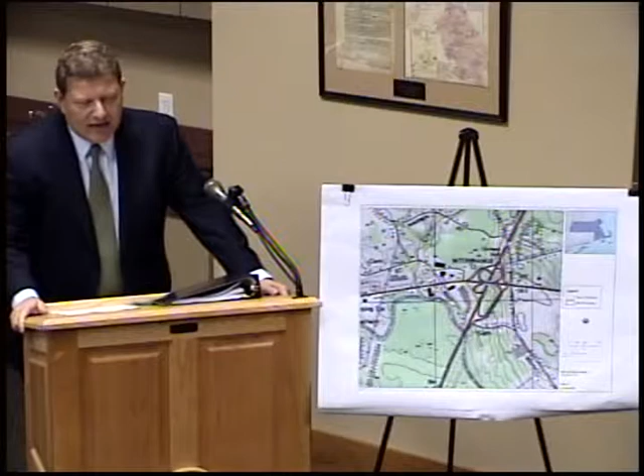So I guess I will say what I think we believe is going on up there, and I think that the position that we've put out in the RDA and the recommendations that you've gotten from Ms. Nover really indicate that there's probably some additional facts that need to be gathered to conclusively determine whether or not there's a hydraulic connection between the wetland that's north of the hotel and the channel that goes by the RK site. So this is what you're looking at here.

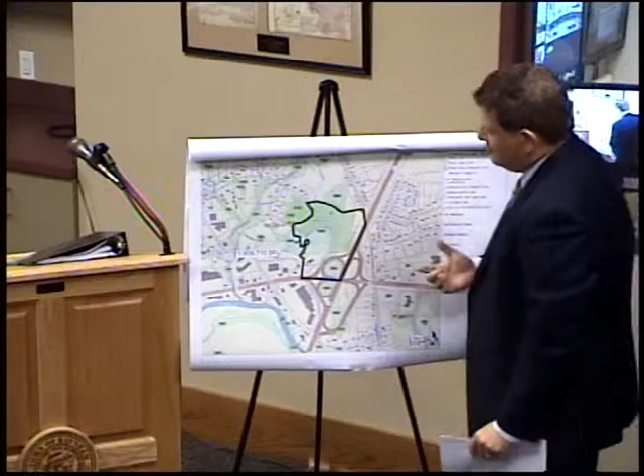Based on the field work and investigations that EEA has done for us in this area, our view is that this channel conveys stormwater from the southwest quadrant and the northwest quadrant of this interchange. The connection is shown here on the plan between the northwest quadrant and this channel, this intermittent stream.

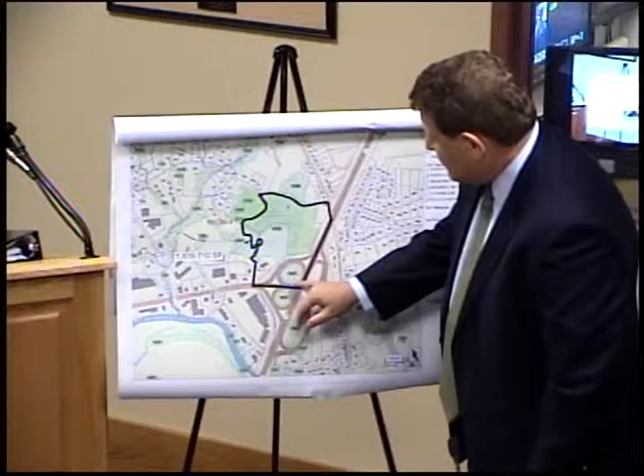It runs down to the east of the hotel. There's really no connection shown on the plan between this wetland in the southwest quadrant and the wet area in the northwest quadrant. But based on what I have heard and read and seen in other plans, there is apparently some connection, and the water goes to the north and then to the west, then into this intermittent stream.

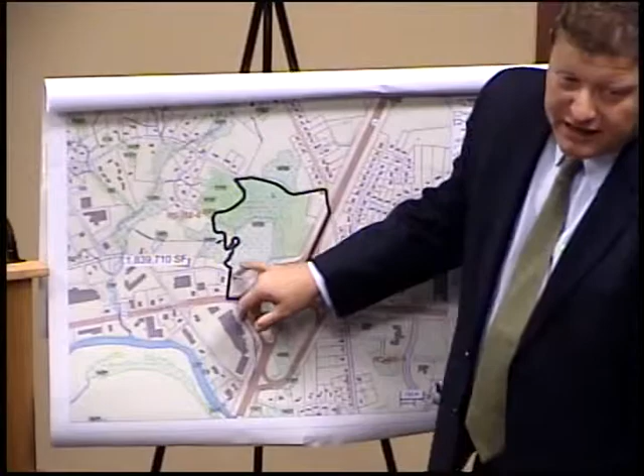So there are a couple of things we believe are not happening here. One is the hydraulic gradient between this intermittent stream and the channel that's in back of the RK property. We don't think that's been established conclusively. The plans we've seen from the NOI filed by the hotel property show this as a 25-foot elevation.

We know there's a pipe that goes under the road. Plans from MassDOT, some historical plans, show it in a couple of different locations. There's one plan that shows it on this alignment, and other plans that show it more on this alignment where you see this blue line.

So we're not at all convinced, not at all certain, based on reading Ms. Nover's report, that there is a hydraulic gradient here. There's clearly water behind RK, but that water is coming from the reinforced concrete pipe that leads to the catch basin, and it's coming from, I believe, a couple of other connections that come off the MassDOT property. So the hydraulic gradient, I think, is still in question.

We don't think it's been established. We believe it's not there based on our field work and field observations. The second point that I think is not at all clear is whether or not this intermittent stream actually connects to the wetland. If it only connects to the wet area inside the interchange, then it's not a jurisdictional area, it's not a resource area, and the water coming through there is coming through because it's an artificial stormwater BMP.

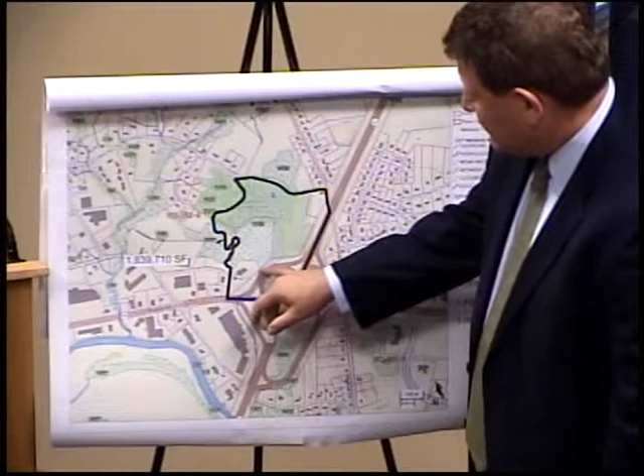It's in this general vicinity, but I'm not sure that it comes this close to the southbound off-ramp. So our position remains that it's not a jurisdictional stream, it's not subject to the act, it's not subject to the bylaw. And the work that we did out there was further maintenance of the channel, intended to discourage mosquitoes.

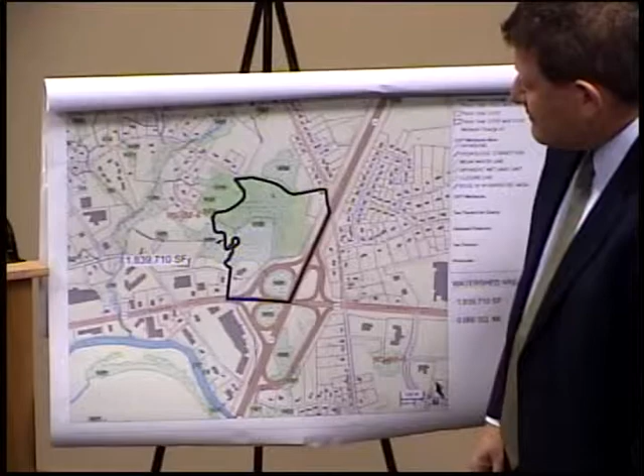Certainly, I think the cutting down of the trees went further than we had intended, and we're willing to restore those trees, but it remains our position that it's not a jurisdictional area.

Yeah, I would try to speak to that, actually. I think that where they're going with this, I'm Nova Armstrong. I need you to get near a microphone so you don't get... I'm Nova Armstrong.

I think where they're going with this is the definition of a stream and hydraulic flow due to hydraulic gradient. I was out there, and I provided in my report a picture of this stream flowing up gradient of the subject site, adjacent to the Hampton Inn property on MassDOT land, that clearly was flowing into the 24-inch RCP that I provided a picture of.

I think that the topography provided by the Hampton Inn application wasn't detailed, and the channel is very channelized and deep in places, and they didn't get elevations along the channel from what I can see. I have a copy of that Hampton Inn plan that I actually got from the Conservation Commission office, if I could step up.

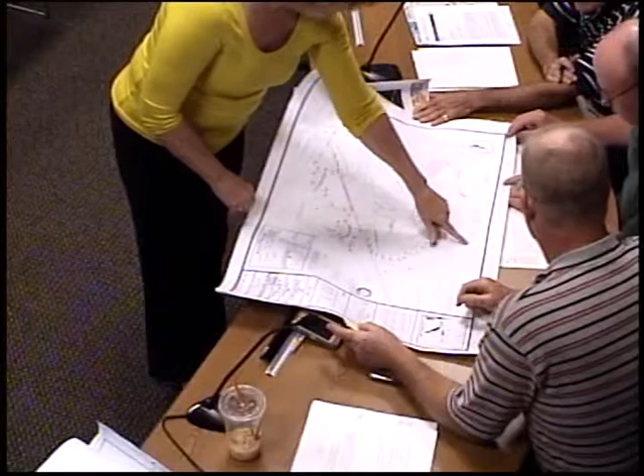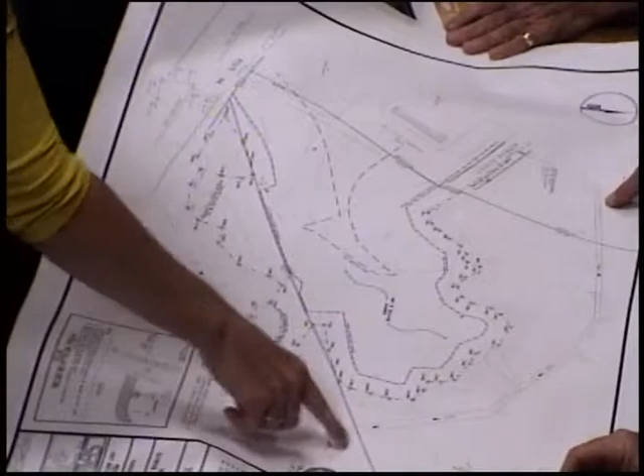So this is the plan that I obtained from the Conservation Commission office, and it shows it as a swale, and this swale enters another channel that comes in this direction. This is the actual intermittent stream, as well as this intermittent stream. There's no real topographic detail along the stream, and it's very deep in areas, like I said.

It's channelized, and it's constantly cutting, so it's becoming deeper and deeper, and it was flowing into the RCP yesterday when I observed it. As well as on the other side, on the subject site, it's entering Mass highways, Commonwealth of Mass land, and it's actually flowing by hydraulic gradient from the outlet to the site.

I took pictures of that. Unfortunately, I didn't print those out, but I do have a picture of it. Do you have a plan that shows that connection? I do.

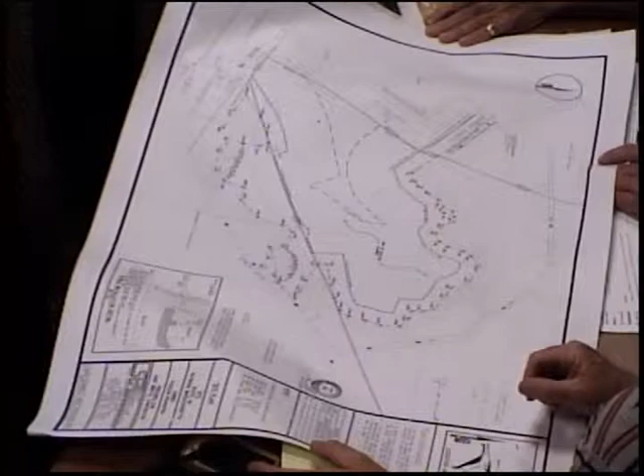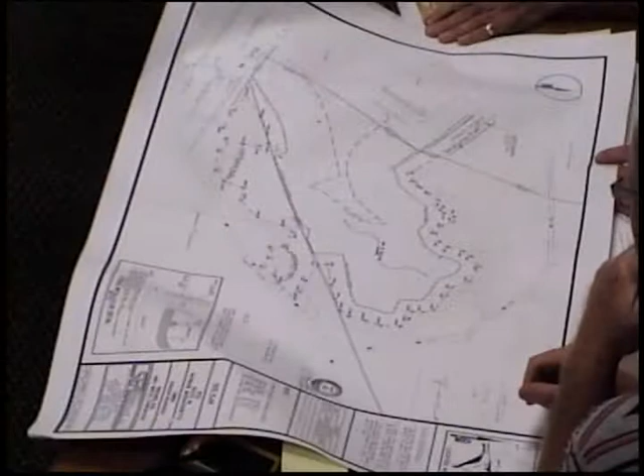But before I show you that, another point they were making was that the stream, this culverted wooded swamp, flows across under what I think is the southbound ramp, and enters this channel and flows onto the property. Actually, there are two other intermittent streams that flow into that stream as well, through this wooded swamp. There's a flea market back here.

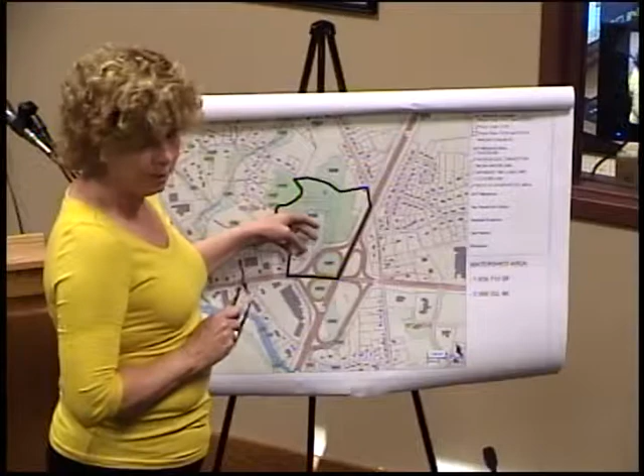If you look at Google Earth, you can actually see the channels there. So there are two other intermittent streams, I believe, that come through this wooded swamp and flow into that stream, which is the historic Pale Brook, according to Mass Highway historic plans. Sorry, can you hang on one second?

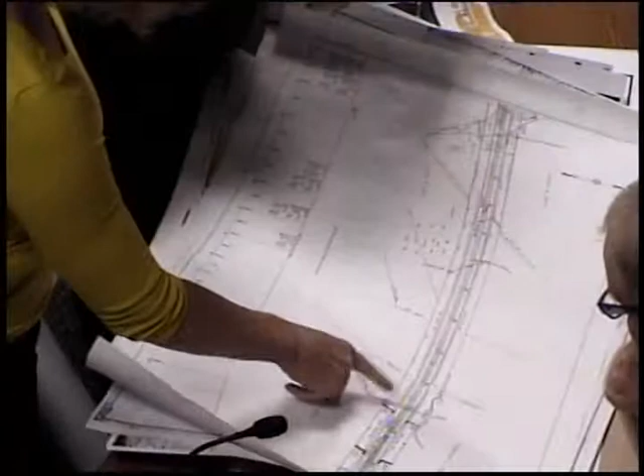There's a couple of plans. I think the important thing to note is the location, at Station 56, with the 24-inch RCP. This plan was actually provided by Mass Highway tonight to show the commission.

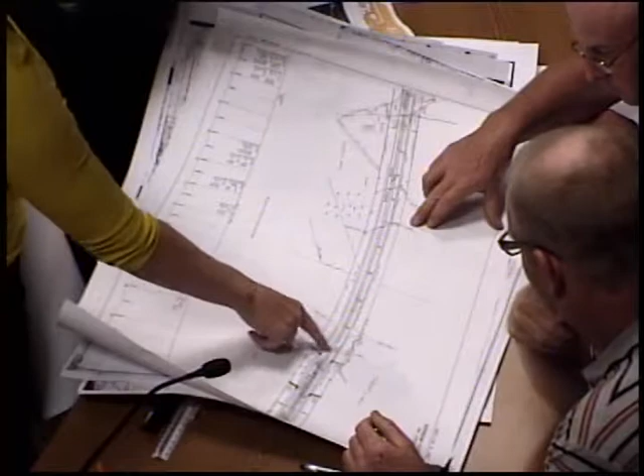I do have other plans. This one is titled Raynham Cutoff, 1932 construction. Here's Pale Brook at Station 56. This doesn't actually exist anymore because the alignment has shifted more this way.

Just a point of information, Attorney Darrow—if you would let her finish. Okay, so that's that plan.

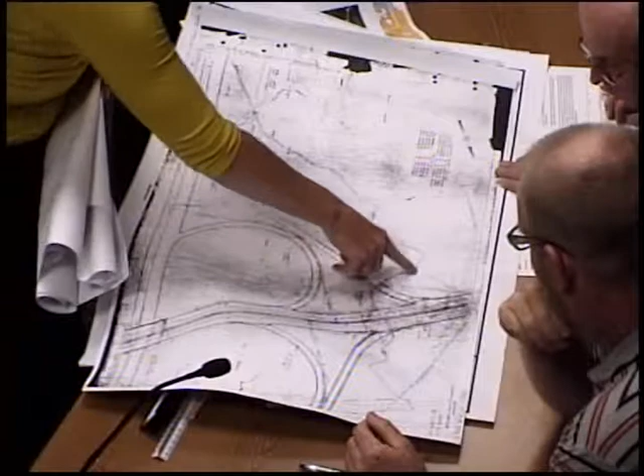Here's sheet 19 of 36, the Raynham Boston Fall River Expressway drainage detail. Here's Station 56 again, and here's the brook coming in under the highway through a 24-inch RCP. Here's the cloverleaf shown. So it comes in and flows off to the Taunton River, located south of here.

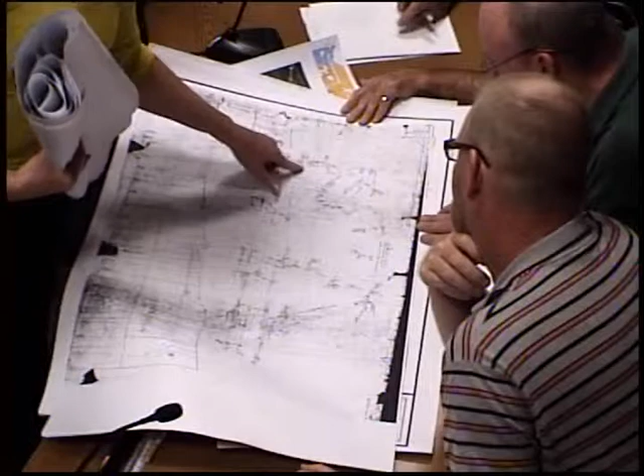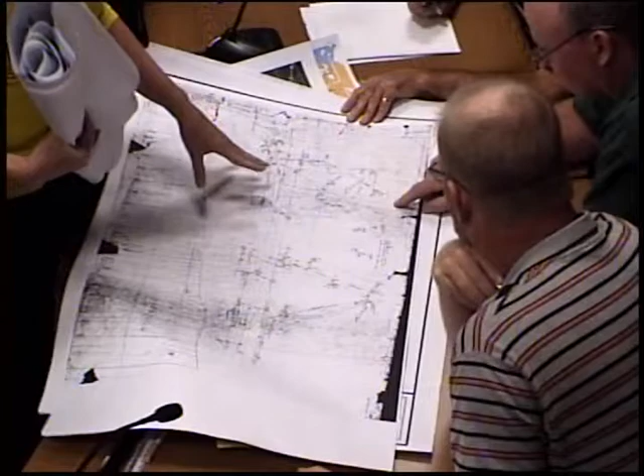Here's another plan—these are old, a December 1949 plan. It shows the 24-inch RCP that was extended in '49, and it looks like a headwall was constructed. It shows old Judson Street here, and a series of ditches and streams flowing through that were most likely channelized over the years and not in their original location. Again, Station 56.

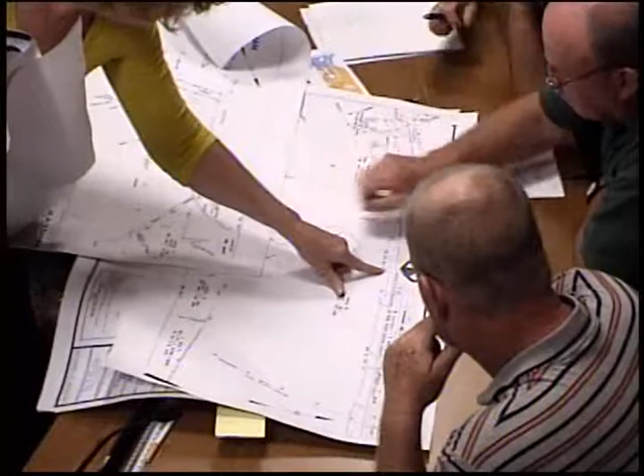This is a picture of the same brook, from a 1950 plan. It shows the 24-foot easement here, which connects down to here, and goes like that. Here's Station 56 again, showing the 24-inch RCP. So many historic plans show that 24-inch culvert under Route 44 carrying an original stream, Pale Brook.

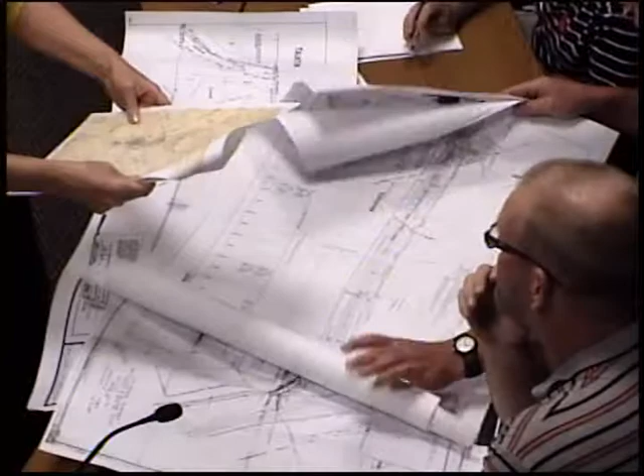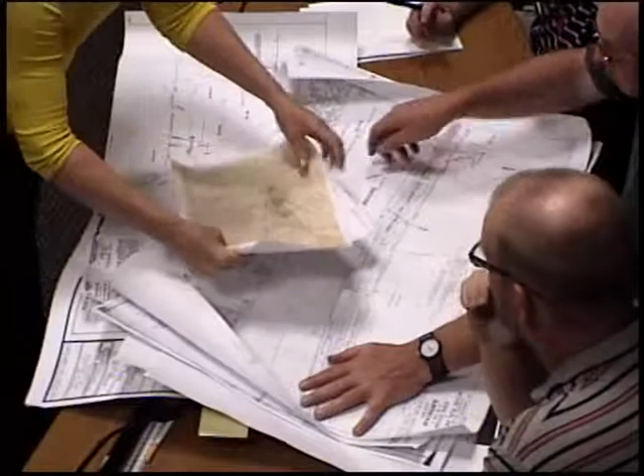Additionally, these are all plans for your file—copies for the commission. There's also a historic USGS sheet, I believe from 1893, that shows this stream right here.

This is Dam Lot Brook flowing here, and this is the stream. It's actually flowing under South Street right here.

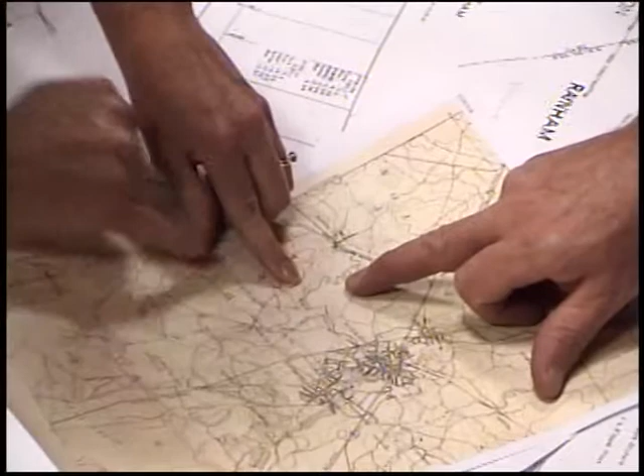I think the question they're raising is about the hydraulic gradient. To me, there's a clear hydraulic gradient from the north side of Route 44 to the south side, based on my observations of water flowing into the 24-inch culvert and out the other side, then through the Commonwealth Mass land east of the property boundary, on the east side of the chain link fence.

So the whole—yeah, these are part of your file. That's right.

The point of my goal was to determine whether there was an area subject to protection on the site, and from there, first determine that there is an area subject to protection—meaning the stream, its banks, and land under it—and then an area subject to jurisdiction, extending 100 feet from the bank and land under. Then also, there's still the question of whether that stream is a river, and we didn't have time to fully evaluate that.

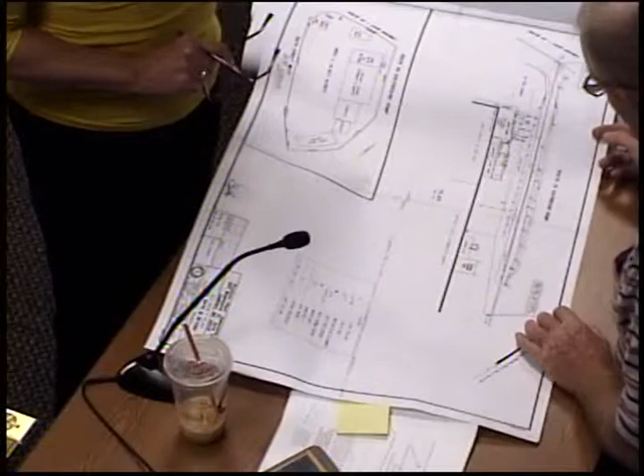This plan here went with the certificate of compliance request that I obtained from the Conservation Commission files. What this shows is, I believe it was Walter Hewitson that flagged this, because he marks his flags with WH, and the channel is here. He actually hung flags west of the channel, which indicates there's some fringing BVW along that channel.

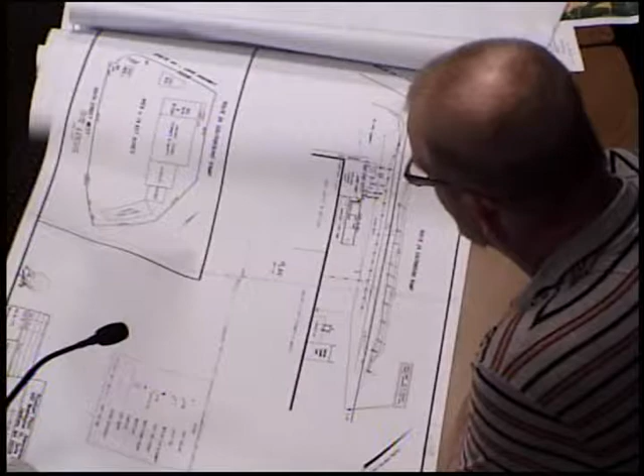This is just another supporting document showing it was the opinion of other professionals. Walter Hewitson has a PhD, and this was an area subject to protection, therefore warranting flagging of the bank and vegetated wetlands. And this was done for your property?

We didn't own it at the time, so we don't know what purpose it was done for. It was the change from Kmart to Bed Bath Beyond, that remodeling, and that's what it was done for.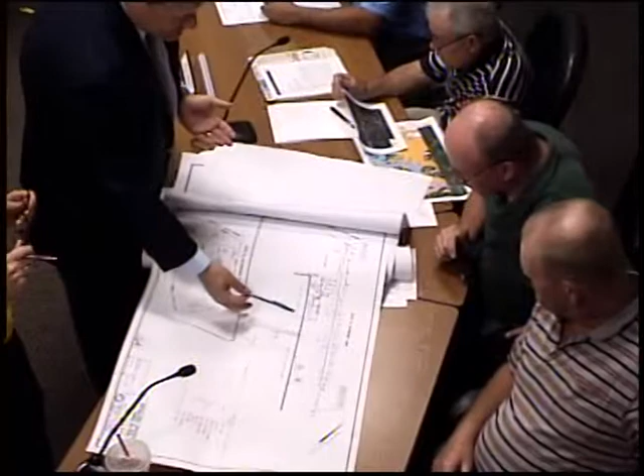Could I raise a question about this plan? Is there a wetlands delineation report that went along with it? Because this doesn't indicate to me that a wetland has been flagged. In your report, you said this plan showed a stream here, called out as a ditch. This is clearly a stormwater conveyance, and the fact he chose to label it as such - we've got a ramp right on this side of the ditch. I don't know what he would have been flagging there.

Well, this is just an as-built of whoever did the original flagged plan. This area doesn't actually see the finished plan in most cases. Hayward, Boynton, and Williams, who drew up the plan, labeled this the southbound ramp, but it's really the easement and land associated with Route 24 and all the ramps. As for the labeling of the ditch, I've seen that - I've worked in this business for 30 years - engineers and surveyors call it a ditch all the time, whether it's a stream or not.

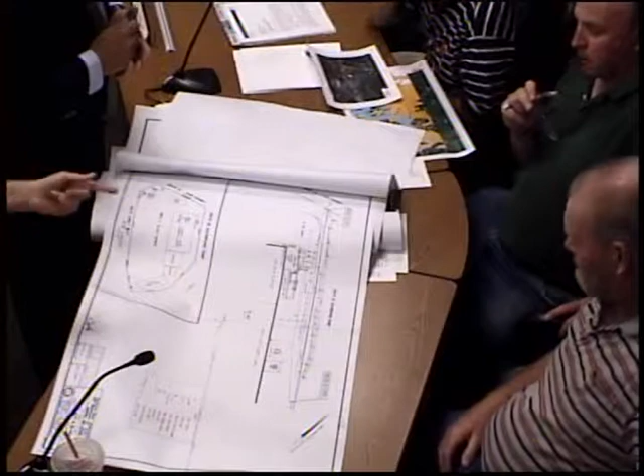So was there an NOI filed in connection with this? Yes, actually there are two applications on this property in question, which I found rather interesting that VHB and EA, in doing their research, either wittingly or unwittingly, left out, because they did have an opportunity to look at the files on record. It shows a notice of intent filed on that property under wetlands file number SE 269-601 and SE 269-676. So there are two applications.

Now, back when they filed those notices of intent, there was no Rivers Protection Act, but there was clearly a stream definition with banks, and they flagged both applications. They delineated those resources as banks and BVW with the notice of intent.

My question is about this 2004 work - this is a 2004 plan. Was there a 2004 NOI? Absolutely, there was an NOI filed for that, and an actual certificate of compliance was issued. Historically, from geological maps and street maps dating back to 1855, that is actually a named stream. So whether they call it a ditch, the fact is it's still a stream, intermittent - that's why they flagged it, and there's a bank resource associated with it.

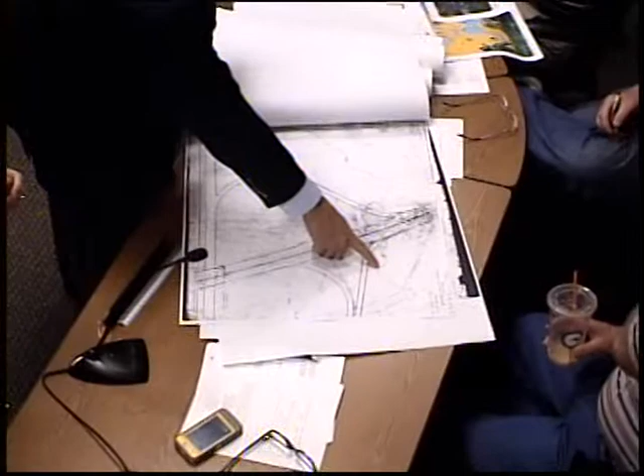But if I could just turn back to this plan - if this is the location of the reinforced concrete pipe, that's fine. But I've got to say, you've got a hotel in the middle of this brook, because when Hampton Inn came in and built their facility here, their plans showed the intermittent stream along this alignment, and they built their hotel and parking lot right in the middle of this brook. We've gone in, we've done a little bit of clearing, and I think we're being targeted here. There's a building in the middle of the brook - I don't know how that happens.

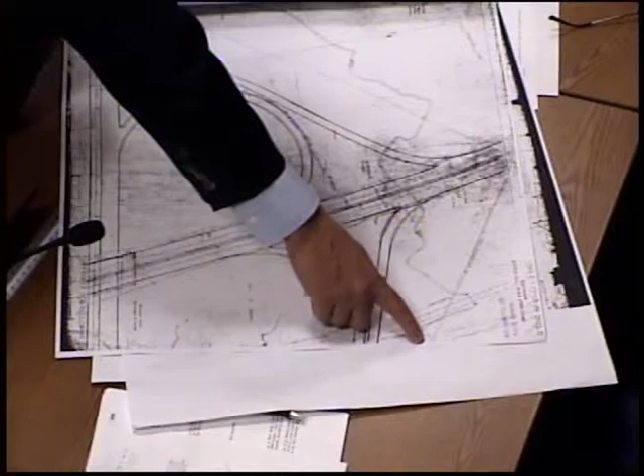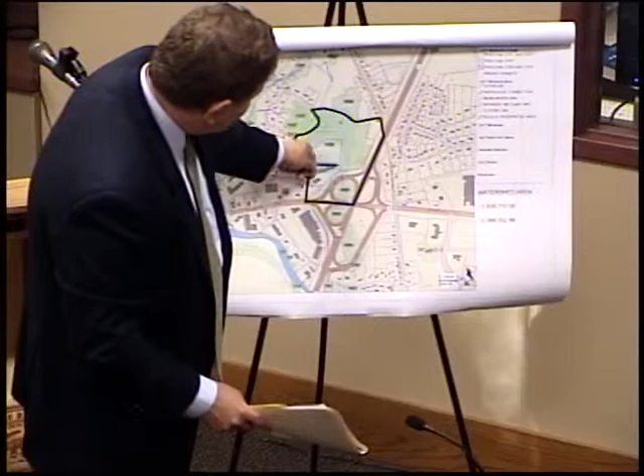Because every plan that I've seen that's current shows an intermittent stream along the southbound exit ramp that vaguely may connect to some kind of swale that comes from the west here. Okay, and this black line, all right, there's this part of the wetland. This is in question right here, whether there is actually a connection between this intermittent stream, which is in the same location that's shown in the Hampton Inn files, and this resource area. We think that's still fairly vague. Okay, but as I said, if you look at Google Earth, there's a clear connection that you can see, actually, from the area behind the flea market to the stream that flows

under 24. Hold on a second. Do you have the actual drawings for the hotel? I don't. No, I don't.

Mr. McCray, the point of the matter here is whether you find that the information supports that it's a perennial stream or not, you still have an inland bank resource. And that inland bank resource does not have to be associated with the perennial stream. It can be associated with an intermittent stream. And the hotel might provide information relevant to this application, but that is not the subject of your enforcement order, nor the subject of this request for determination.

No, I mean, right now we're arguing about somebody else's property, which we're not doing, but I'm just curious for something. I'm sorry, were you finished? Yeah, go ahead. Does that historical plan have elevations?

One other point: the definition of a stream flows out of or within an actual area subject to protection. Now, on the other side of the north side of 44, adjacent to the Hampton Inn, is a fairly large wooded swamp, which that stream, this stream, here, is flowing through. So regardless of what's going on up here, it's flowing through a wooded swamp in this location and under 44. So by definition, even at that point, it would be a stream.

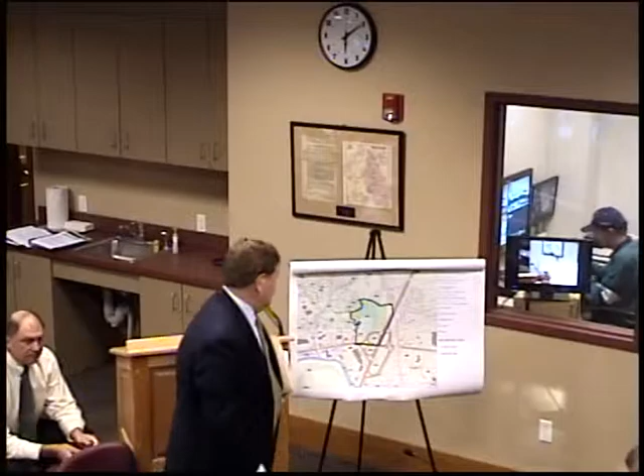I mean, it was clearly a wooded swamp, red maple, skunk cabbage below. There's evidence of saturation and flooding.

And how do you distinguish that from land that's subject to flooding? Land that's subject to flooding has a completely different definition in the wetland regulations, and it's associated with flooding and not vegetation in the wetland hydrology. Completely different performance standards, doesn't have a buffer zone.

Right, I mean, we're not arguing that there's water here, but we're arguing that it's a stormwater conveyance that serves this quadrant and this quadrant of the interchange. It's clearly wet, and it clearly has some wetland properties, but is it a jurisdictional wetland? Our expert says it's not.

Does anyone else have anything to say? Anyone in the public have anything to say?

I would just add, Mr. Chairman, that our desired outcome from day one has been to go in and restore the area. We'd like to do it under a negative determination with conditions. We think that meets everyone's purposes. We appreciate that the independent outside review recommended an affirmative determination, but we would be out there in a few days restoring the area, or at least talking to you about an acceptable restoration plan, if we have a negative determination here with conditions. So that's where we'd like to get to. Our position hasn't changed. I think that's it.

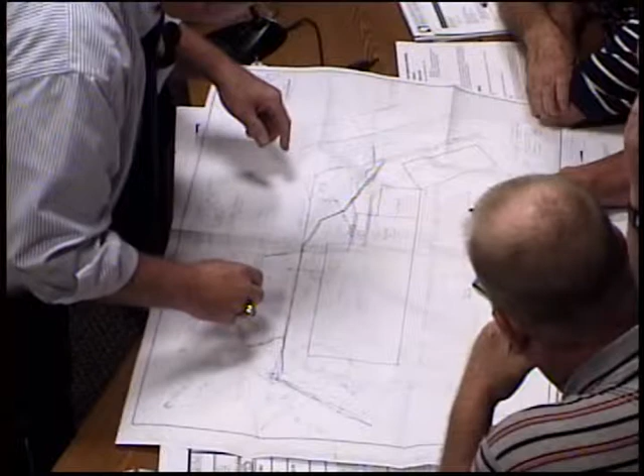This is where the stream existed originally. Comes up here. This is the 24-inch cross culvert under Route 44 by the ramp, okay? That came down here. And what they did was, they wanted to develop this property, as shown, so they requested a permit to rechannel the stream. And this is what they did. This is the channelization here, shown here, okay?

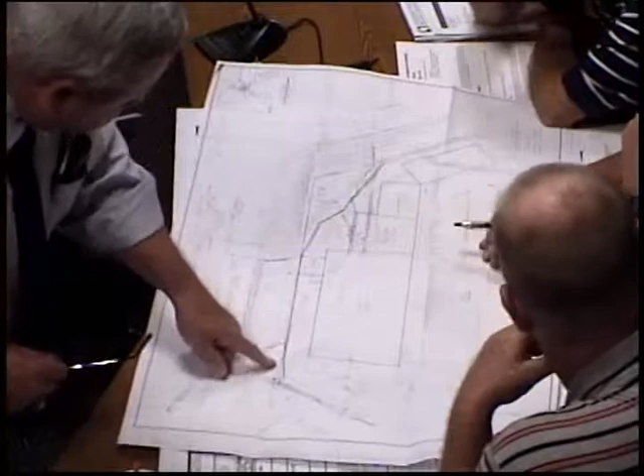And we issued that permit after proper reviews. And so the old stream bed here was then rechanneled into this very straight type angular channel under this permit.

Now here, you see some drainage that comes in here, and it's still the same thing. This is the 12-inch head wall. This is a drainage channel here. This is the natural stream channel, as far as I can tell, as far as I can determine the original stream channel. You can see it here. Comes down over to here. So, yeah, if I follow it, it goes like this.

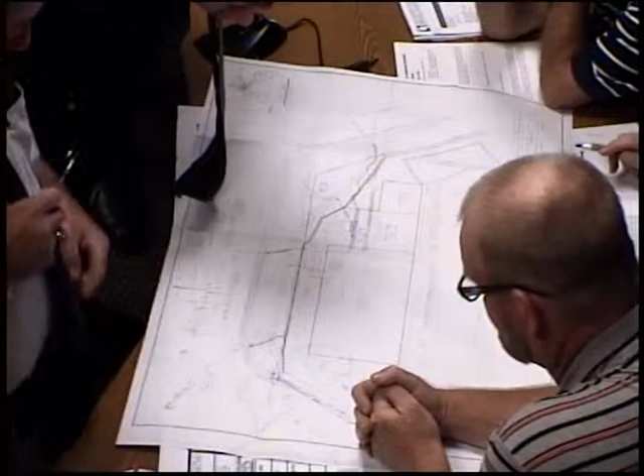Push back into this, into here, right? Yeah, this is which is straight, what's there today. Straight. And then this is the 36-inch culvert that goes under Route 24 to the other side of Route 24 and into the Taunton River on that side. And this is part of your packet. And here's a copy of that permit. Okay, that goes along with that.

So even back then, in 1974, it was recognized as a stream. So historically, physically, regulatory - I don't want to sound like a broken record, but, you know, and it's not original with me, but I've always heard this statement: if it looks like a duck, walks like a duck, quacks like a duck, it's a duck.

Those are just some of the points I wanted to make, Mr. Chairman. I would caution the commission that stuff listed in this request for determination is probably not able to be approved by the commission.

Anybody else? I will just make one last point. We did prepare a planting plan that we submitted to MassDOT in draft form to the Boston office. I never saw it, haven't heard back. We have not submitted it to you because we wanted to get input first.